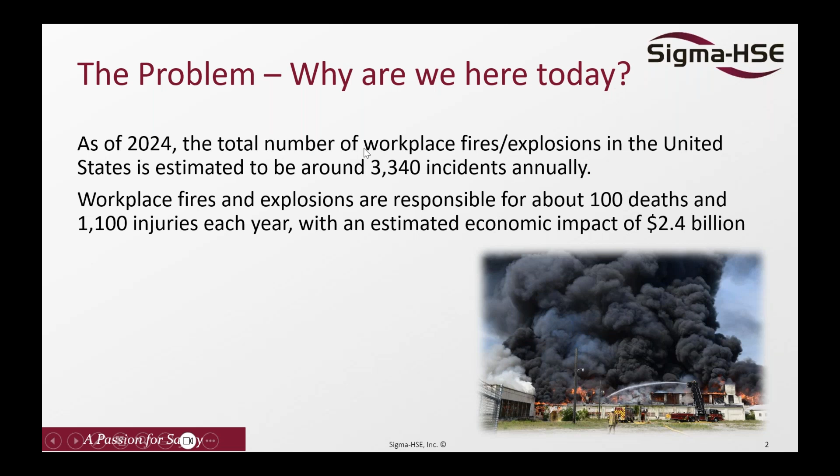First, I'd like to introduce myself. There are 2 co-presenters today, I being one. My name is Donald Nicholson. I have over 25 years of experience in the testing, inspection, and certification industry. I've served on various committee roles for leading standard development organizations, which include NFPA, ASTM, TIA, UL Standards Development Committee, and BICSI. I've also served on several boards of directors for various testing, inspection, and certification companies.

My co-presenter, Mark Yukich, has approximately 10 years of experience in process safety pertaining to combustible dust consulting, training and testing, mitigation of flammable vapors, and thermal reaction safety hazards. He provides a very consultative approach to pinpointing an efficient path towards reducing risk within a plant facility. So both of us will be co-presenting today.

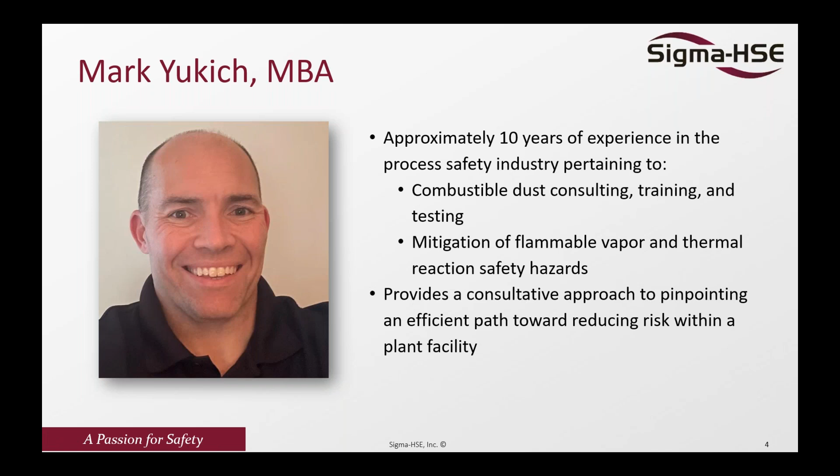But first, just a little bit about Sigma-HSE. We are your process safety partner. We have global locations in the United States, the United Kingdom, and also in India. But you can find our global staff almost anywhere around the world. Wherever you need us, we will be there.

The way we look at process safety management is in three different buckets: consulting solutions, testing solutions, and training solutions. I won't go through all of the subcategories there, but you can see quite a few of them if you look through. Our global team of engineering specialists and technical experts work with companies around the world to provide actionable solutions to protect, enhance, and optimize different processes.

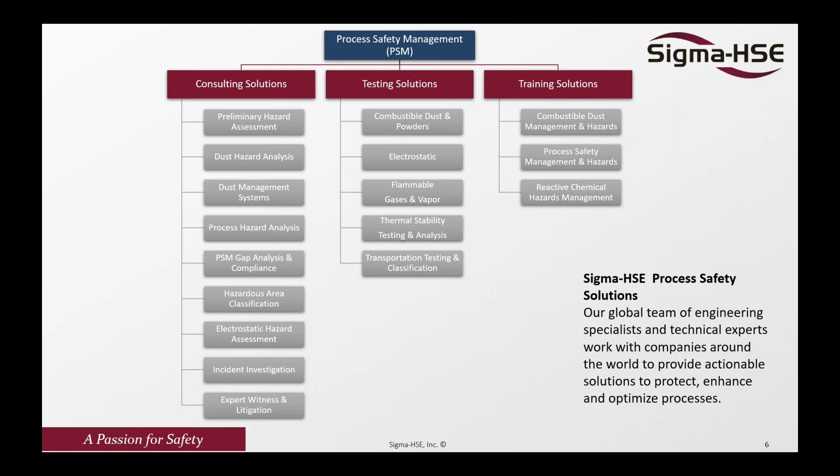Here's our presentation outline for today. We're going to go through process safety management, PSM, which we'll be calling it going forward. Does your facility fall under PSM? Do you need this? How would you know? We're going to tell you about that. A risk management plan - do you have one? Environmental and occupational health and safety regulations - do you know them? Are you following them? Safety instrumented systems - do you need one for your facility? Should you have one in place? Emergency preparedness and response - are you fully prepared and ready to respond? And last but not least, do you have a true practicing safety culture within your organization?

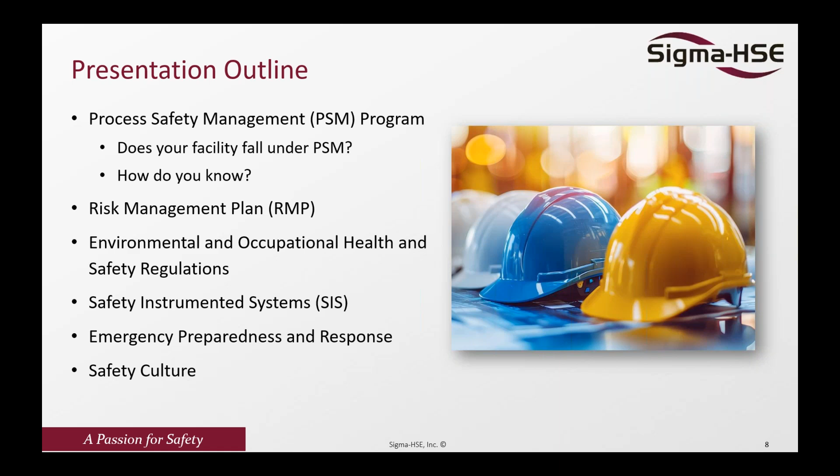Well, jumping right in, first off, we want to take a look at what determines if your facility falls under the PSM requirement or not. The first step is you want to determine what chemicals are listed. You can look to the chemicals listed in OSHA Appendix A of the PSM standard. Check to see if you have those chemicals and whether they are at or above the threshold planning quantity, or TPQ, noted within that standard. So you want to start off by creating an inventory of all your chemicals at the facility and those quantities, then compare that to the list.

This list is noted in pounds. Some examples of common chemicals are chlorine at 1,500 pounds, fluorine at 1,000 pounds, hydrogen chloride at 5,000 pounds, just to name a few. If the quantity of hazardous chemicals on site meets or exceeds these quantities, then you fall under PSM. PSM also applies to facilities that process flammable liquids or gases in quantities of 10,000 pounds or more.

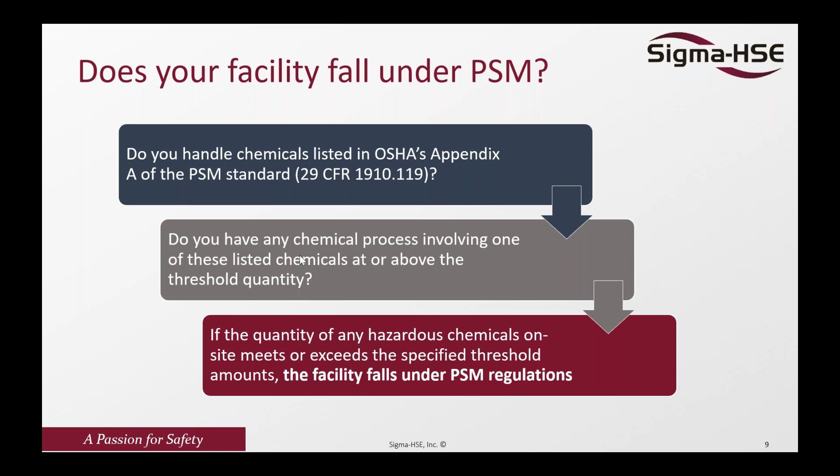Now, quantities can vary due to their context and regulation. So extremely hazardous substances have threshold quantities that are either 500 pounds or whatever's within that OSHA list, but the determining factor is whichever value is lower.

So there are special exemptions that are called special thresholds within the standard. An example are ones that are available for retail gas stations that will allow for higher amounts of fuel to be on site.

Now, some other exemptions are retail facilities, with the most common income coming from chemical sales, processing hydrocarbon fuels used solely for heating and refueling, oil and gas drilling operations, and normally unoccupied remote facilities.

You also want to be aware of some local differences to the code, where they may be more stringent. For example, in California, they have a code with their own maximum allowable quantities.

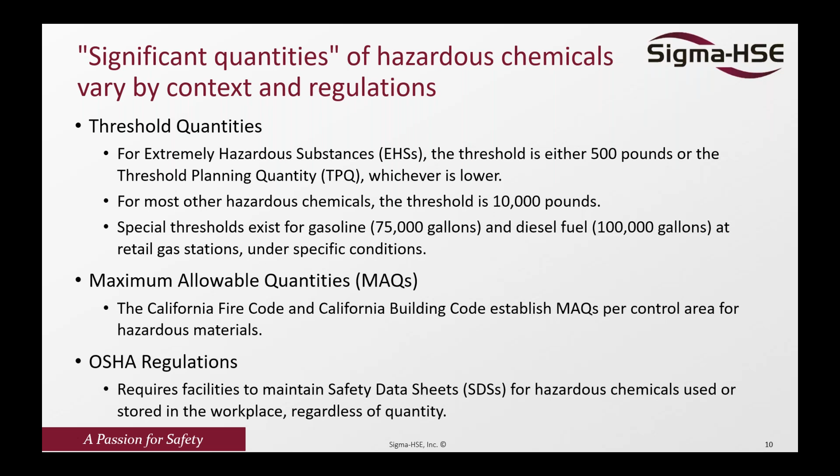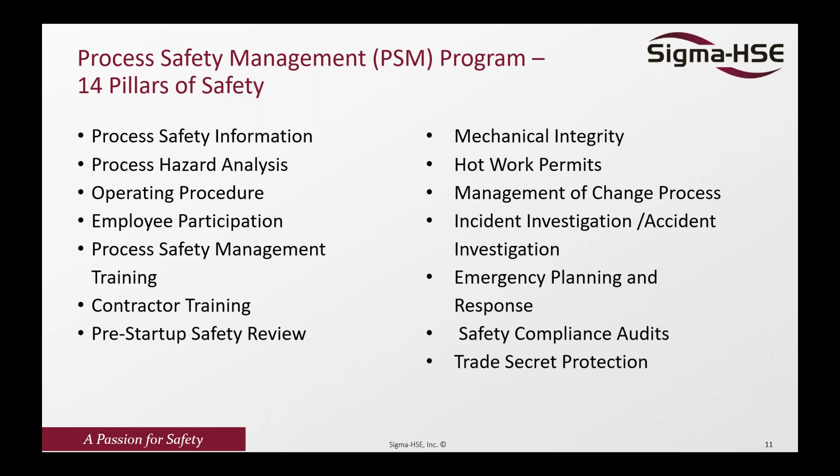Now that you know your facility falls under PSM, a comprehensive process safety management program is required. In the OSHA standard, there's something called the 14 pillars of safety that are listed here. We won't be going through all of these, but this just gives you an idea of all of them, but we're going to dig into a few, some of the highlights of those.

Earlier, we talked about documenting the chemicals on site and the quantities of those materials, and if they meet or exceed the amounts noted.

In addition, we will cover the importance of having employee participation, the gathering of your facility's process safety information, a process hazard analysis, options to consider, the development of written operational procedures, training, and other standard operating procedures.

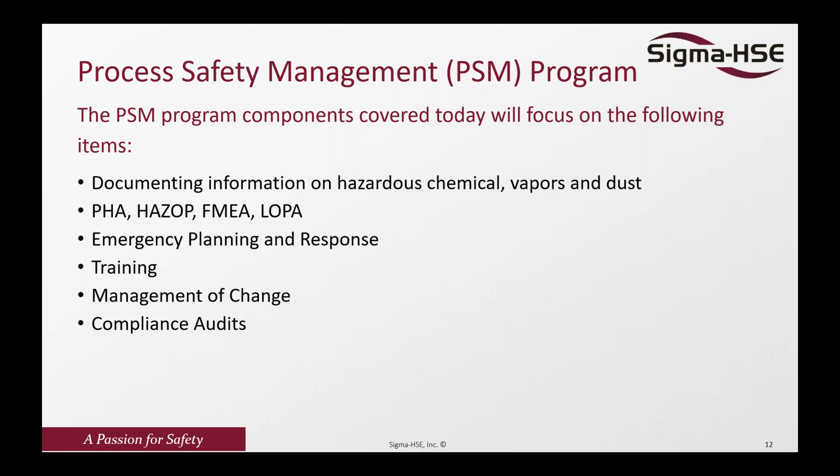Let's take a look at the core components of a risk management plan. The core components of a risk management plan should start with a hazard assessment that will determine the impact should a chemical release or reaction occur.

So how will this event cause any health-related issues to your personnel as well as the neighbors of your facility? What steps can be taken to act quickly to minimize such a release? Also, the reputation of the company would be at stake with such an event taking place, but the safety of the people are always the first priority.

The next component is the development of a prevention program. So in this item, we would consider some measures to prevent an accident from occurring and considering multiple layers of protection in the event one of those other protective measures should fail. It's advisable to have more than one safeguard.

The other component is establishing an emergency response program. This piece of your program brings to light the importance of working with your local emergency agencies, establish a plan, and ensure a clear understanding of how your team will react in the case of an event.

In the event of an emergency, personnel should have their roles, and it is helpful for the outside emergency crew to know the type of materials that are in your process while they're making their way to the location following the report of an event. So for example, if you have a water reactive sample, it's helpful for them to know ahead of time that they should be using the correct extinguishing agent once they arrive on the scene.

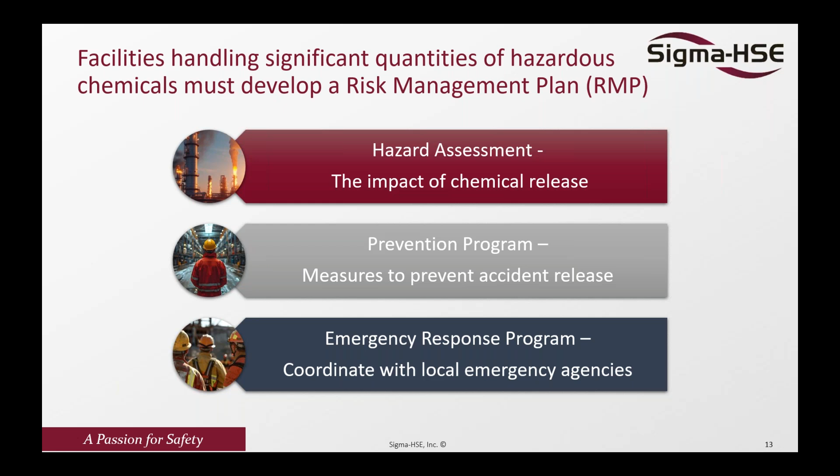So an important area to cover during your review is being aware of areas to keep you compliant with important safety standards and regulations that you may fall under. Some of these areas of compliance to consider are environmental and OSHA standards and other government standards.

It's important to have a common understanding of safety regulations that your facility will fall under. State and local regulations all need to be considered within your process program. As a reminder, don't only focus on those national standards, because remember those local standards may actually be more stringent than the wider ranging ones.

Some hazard analysis options to consider.

Process hazards analysis, or PHA, is a systematic approach to identify and analyze hazards associated within a process handling hazardous chemicals, flammable vapors, and combustible dust materials. When dust is one of those hazardous materials, that portion is considered a dust hazards analysis. Prior to NFPA 652 being released, the DHA was simply referenced as a PHA.

Another option is a HAZOP, layer of protection analysis, or LOPA. The LOPA is designed to identify gaps where you determine a need to implement safety instrumented systems, or SIS, designed to be part of multiple layers of protection to maintain a safe working environment within the process when a failure of one of those SIS components takes place. There are other mitigation strategies implemented to keep the line safe, which we will talk about in just a moment.

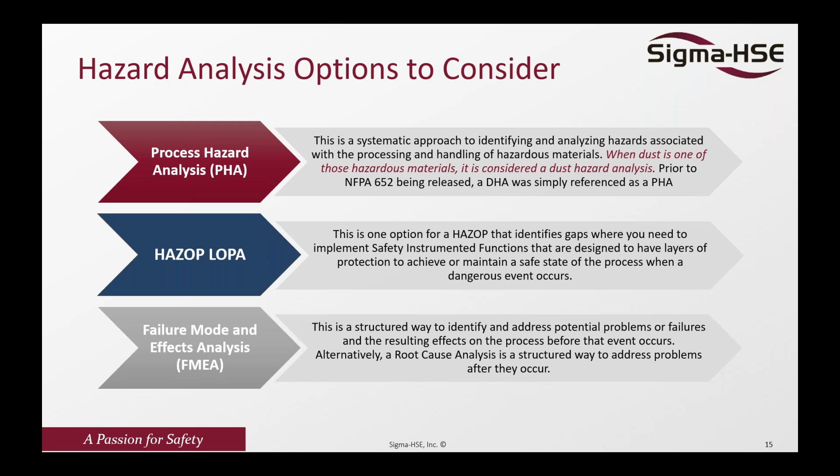We talked about safety instrumented systems and layers of protection. Safety instrumented systems are designed to detect unsafe conditions and will shut down or bring the process within a tolerable safety zone designed to prevent accidents and protect your personnel at the facility. An example of this is an operation operating under nitrogen or argon, designed to keep oxygen levels below their reactivity levels, also known as inerting the process line. The operation will either shut down or make the appropriate adjustments automatically to bring oxygen levels down to acceptable levels.

If your process line is using this system, testing for the limiting oxygen concentration, or LOC, of the flammable vapors or combustible dust within your system is an important step to be sure of the safety levels established. Testing will verify your data instead of basing your safety guidance on assumptions made through experience or literature data that may be available.

OSHA does not mandate the use of safety instrumented systems, but does require employers to implement measures that will control hazards within the process. Any SIS items used within the process need to be documented, including the design codes and standards. The safeguards must be in compliance with recognized and generally accepted good engineering practice. Written operating procedures must be implemented to safely conduct activities within the facility. There is a mechanical integrity component of PSM that requires regular testing and inspection.

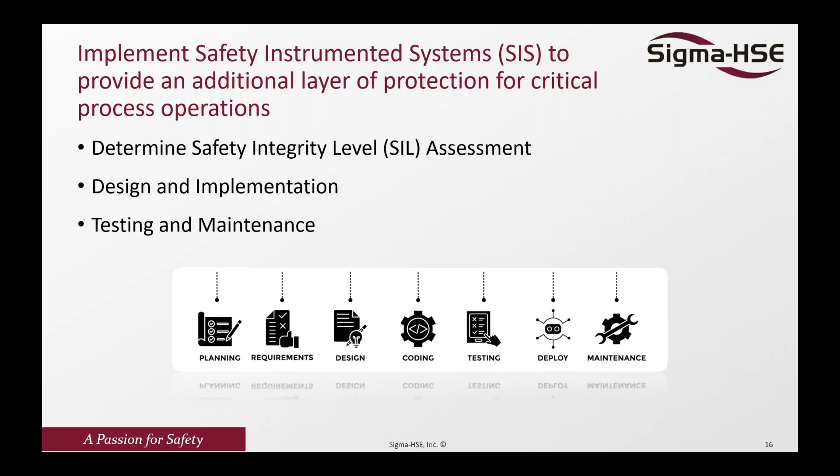The next step is to prepare for a potential emergency and how to respond effectively. PSM facilities are required to establish and implement an emergency action plan that covers planned components, such as pre-emergency planning and coordination with potential outside parties. Establish clear personnel roles that will encompass lines of authority and written communication procedures. These procedures will include evacuation routes and standard procedures for possible fires or extreme weather conditions.

An example of this is developing a clear fire evacuation procedure by communicating a central location outside your facility where your team will meet at a safe distance away. This will allow for a predetermined safety team to quickly confirm that all are accounted for. Another note to stress with your team is to leave immediately without gathering anything prior to exiting the facility.

These steps should be practiced on a regular basis by working with local safety personnel and following up with any critique of response and any action items that need follow-up. Other items to consider: be sure that your personnel are equipped with appropriate personal protective equipment, or PPE, along with the appropriate emergency equipment that may be needed during a possible event. For example, if you're working in a metal fabrication facility, having a Class D fire extinguisher nearby is needed.

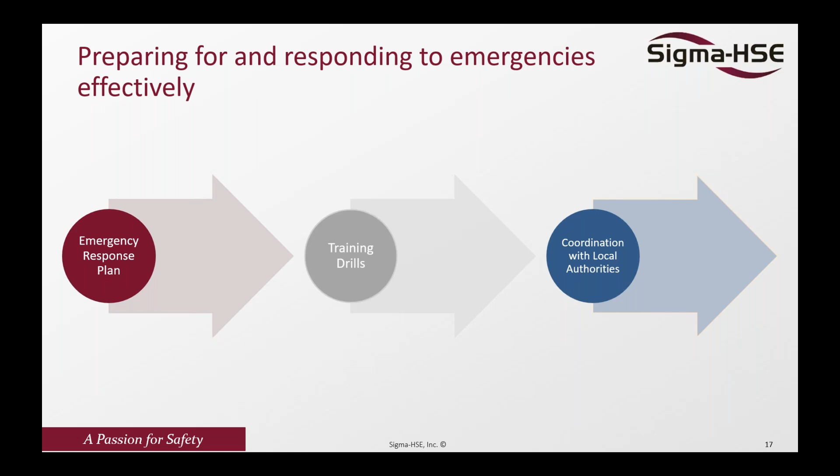It's important to instill a safety culture that has an eye towards continuous improvement of the safety plans in place, by embedding safety into the organizational structure and having a daily focus on creating a clear culture of safety at all levels within your facility. One tactic to consider is establishing an objective of having your leadership team open any team meetings by bringing up any relevant safety topics. This opportunity will allow your team to openly talk about any near misses or other safety training opportunities designed to help keep them safe and the team aware of any possible ways of preventing major accidents from occurring.

There's a 5-stage model that classifies your current level of safety culture, going from lowest to highest. We start with pathological, where safety is thought to be a burden throughout the facility. Next is reactive, where improvement is based on external pressures. Then calculative, where safety is only managed through systems and procedures. Moving up, we reach proactive, where safety is integrated into core values. The highest level is generative, where safety has become a natural part of the organization.